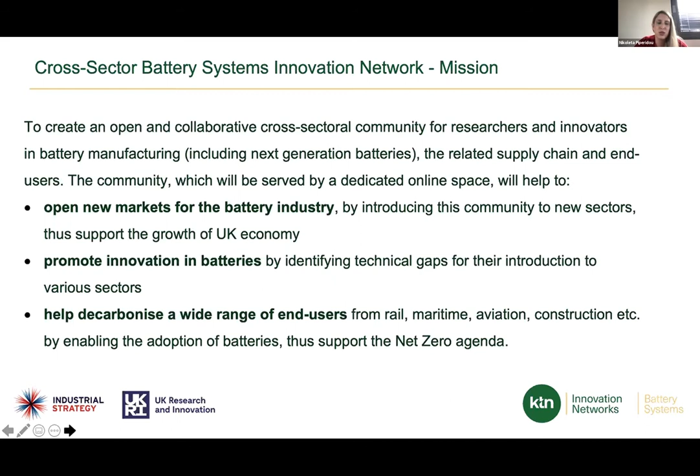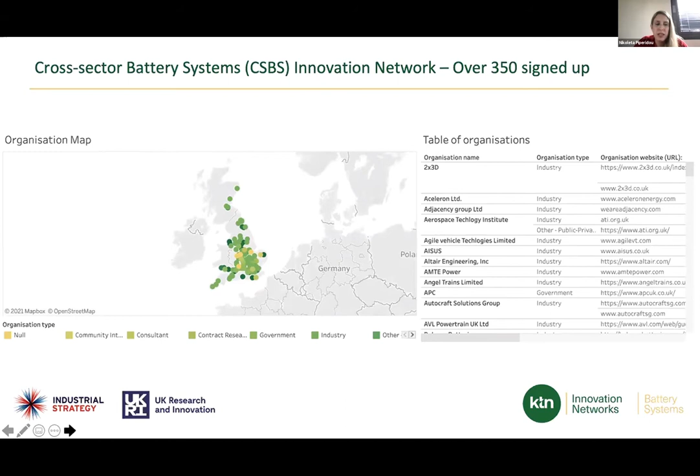We've started from a small and diverse group of founding members, and we've now moved on to over 350 members that we're trying to put together in a landscape map, which will be available shortly in our new online hub. As part of our plans for Q1, we will be launching the online hub, hopefully in 2-3 weeks time. We will then work to improve the hub based on your feedback, and the main aspect of it will be a place for you to go and find any information of relevance related to batteries, funding opportunities, news, and be able to connect with other players.

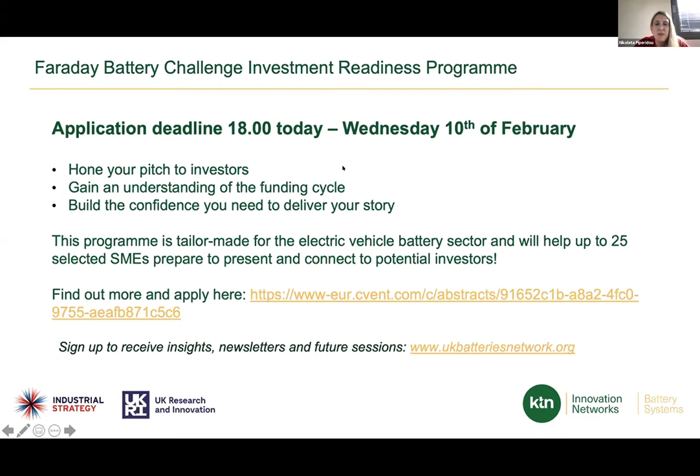Mark, over to you. Good morning, everybody. In the next few minutes, I'll present on the inspiration for us to establish our innovation network around decarbonising ports and harbours. As Nikoleta said, my name is Mark Wray, and I work for the Clean Energy and Infrastructure team with Nikoleta at the KTN. I'm also the innovation network lead, working closely with my colleagues in the transport team, Matthew Moss, who you'll hear from in the Q&A session, who's our maritime lead, and also Simon Buckley, who works on our low emission mobility work. As Nikoleta said, this was one of a handful of innovation networks launched last year.

One of the greatest challenges we face is how to decarbonise our industries and societies at large. For decades, we've built up our systems dependent on fossil fuels to energise them.

The maritime environment is a complex place with many systems converging in singular geographic locations. They're filled with substantive assets, burning large quantities of predominantly diesel fuel to mobilise them. Much of the equipment, vehicles and vessels is transitory and operates on a global platform.

Decarbonising the marine environment is a Herculean task and will require international cooperation with informed and determined local action. This is partly why the greenhouse gas emission reduction targets at an international scale are for 50% reduction. But here in the UK, we are committed to showing global leadership and have a 100% reduction target.

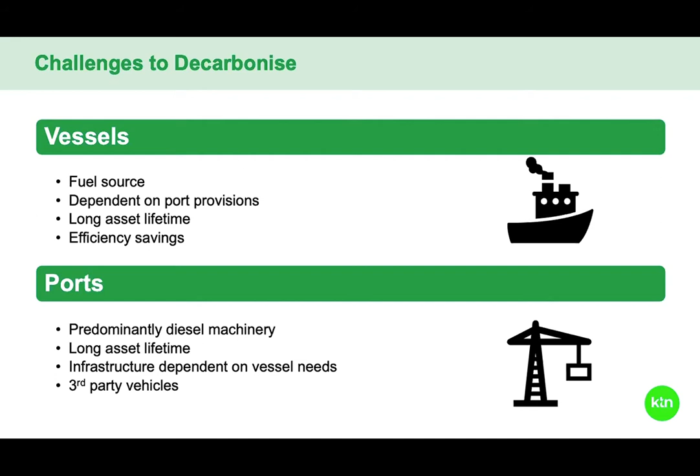So the aim of our network was to catalyse pockets of cross-sector activity and establish a community, a common goal, to enable the coordination of effort in addressing the challenge of reducing emissions associated with port landside activity, whilst also providing the infrastructure to service a growing demand for non-fossil fuel derived energy for vessels and visitors.

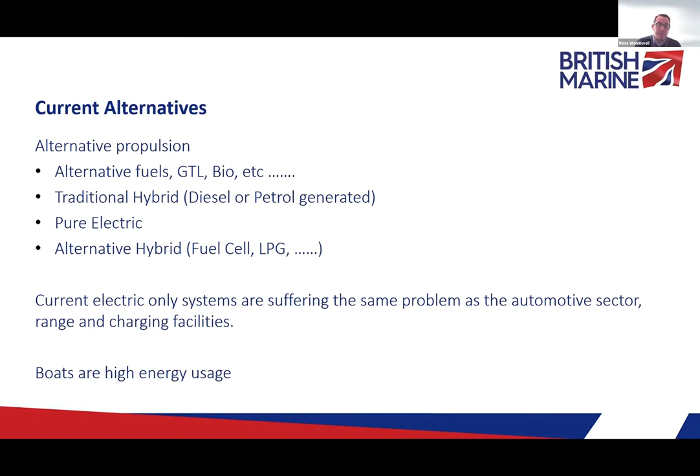Current electric-only systems at the moment for marine are suffering the same problems as the automotive sector, which is range and charging facilities. And in the marine industry, we have high energy usage.

Just pulled up a few examples of the current market, so you can see what's out there at the moment. This is a recreational craft around 35 foot. On a normal combustion engine, it'll have a range of 200 to 300 nautical miles, and probably twin 200, 250 horsepower engines, maybe up to 300 horsepower. With an electric replacement, you can see that you may get 185 nautical miles, but that's running at 5 knots, significantly below the normal operating speed of these vessels, which is 25 to 30.

When you push it, your range is going to drop down to 20 nautical miles. So this is the risk we have at the moment - we don't have the energy storage capacity to enable pure electric, which is why we're having to look at these alternatives.

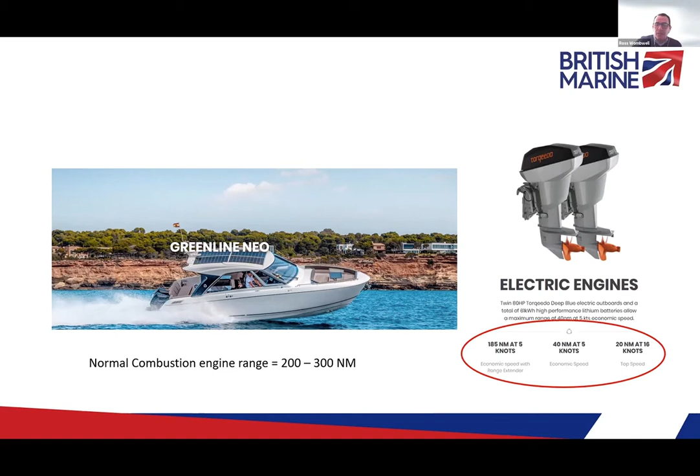Finally, this is one of the bigger boats - a traditional size vessel of what we have at the moment, around 50 foot. Again, 200 to 300 nautical miles, top speed of up to 30 knots, with 2 480 horsepower engines. But when we get to electric, you're looking at 20 nautical miles at 4 knots, maximum speed of 6.5. So you can see we have some significant challenges in how the products we manufacture operate, and these are the challenges we're going to have to find solutions to.

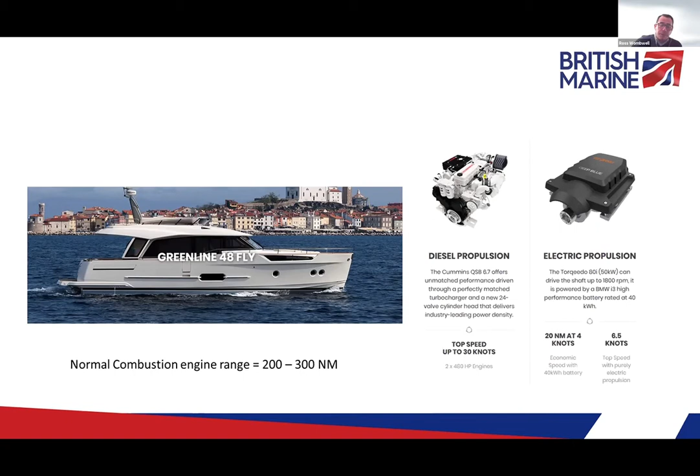The current pressure we're feeling within the industry is definitely consumer-led, and they are now asking for products we have yet to build. Every consumer is asking our boat builders, what's the hybrid package, what's the pure electric package, and in the majority we have yet to have those packages.

Regulation is yet to be confirmed on this for us, but the long-term strategy is being developed by government for the transition to zero net over the next 30 years. We are in discussions with the government at the moment on what the objective of the 2025 zero emission capability actually means - capability is a lovely word. We're certainly going to be looking at what that actually means, and discussing with the government how, as an industry, we can try and achieve it.

The market is small in number, but high cost in price. There is a market, and as I said, it is consumer led. We are hearing that the smaller pure electric, such as electric outboards, etc., they're selling out - we can't get enough of them at the moment. So there is a market for it, and we need the technology to meet the customer and the consumer expectations.

The industry as a whole, lots of SME OEMs, very, very hard to get into. We are a cottage industry, except for a few big companies within the industry, and when I say big, I'm only talking about an 80 million turnover plus. So we are a small cottage industry. It's hard to enter, it's hard to get connections, and that's what we're here to support and to help. And that's why I'm here today.

I'm a commercial director with Artemis Technologies. We're a spin-off from the Swedish America's Cup challenger Artemis Racing. Historically, we provided design and engineering services to both high-performance racing teams and commercial clients, and also developed some unique hardware solutions for our clients, including maritime simulators and other control hardware pieces.

Our big mission when we started the company was really to see how the technology that we'd developed through the America's Cup, namely hydrofoiling and wing sail technology, could support the decarbonisation of maritime.

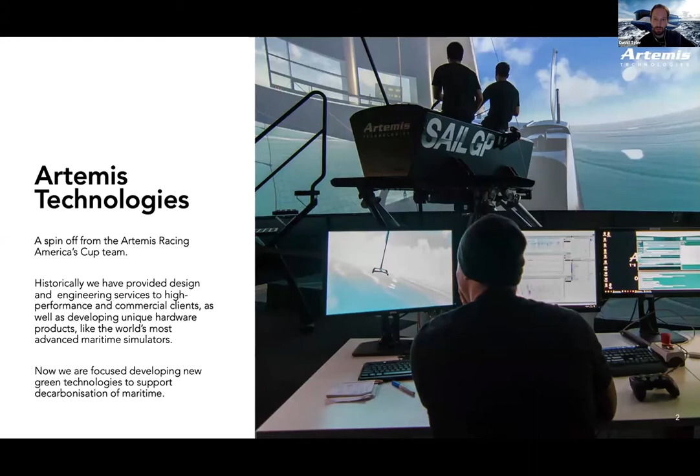I want to talk a little bit about what we're doing and why we're very interested in development of battery technology within maritime itself. Over the last couple of years, we've been developing our Artemis eFoiler electric propulsion system, which is a combination of technologies from the America's Cup, hydrofoils, aerospace, control technology, and high power density engines developed through motorsport. This hydrofoiling propulsion system is for high-speed vessels, and it significantly reduces operational costs through fuel savings. We're hoping to launch this technology later this year.

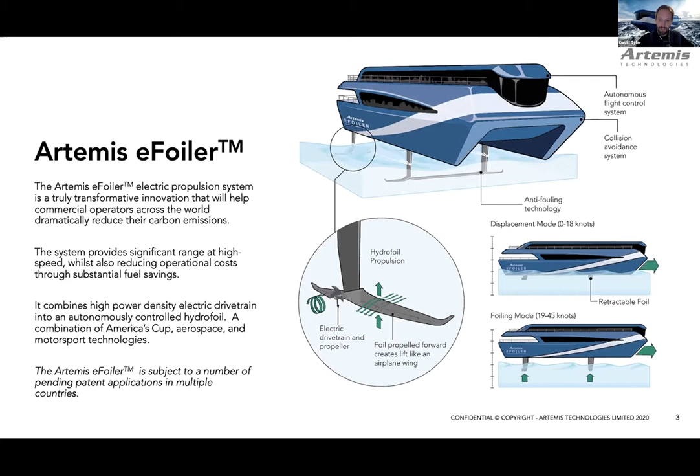The first boat that will launch with this technology will be an 11-meter workboat. It's great to see Ross talking about the other technologies and power solutions delivered by Torqeedo and those players in the market. But with our system, we're aiming for a cruise speed of 25 knots on this 10-ton vessel, a top speed of over 30 knots, and a range of 60 nautical miles at that 25-knot cruising speed.

So we really think that this technology is going to be quite transformative, and for the next few years we believe it will be the only really commercially viable solution for high-speed maritime transport.

Following the workboat, we will be launching a high-speed ferry in 2023. We will also operate that ferry in a pilot scheme between Bangor and Belfast in Northern Ireland. Nominally, it's going to be 35 meters, over 90 tons, with a cruising speed of 35 knots and a top speed of over 40 knots. So really targeting inner city transport, commuter transport services.

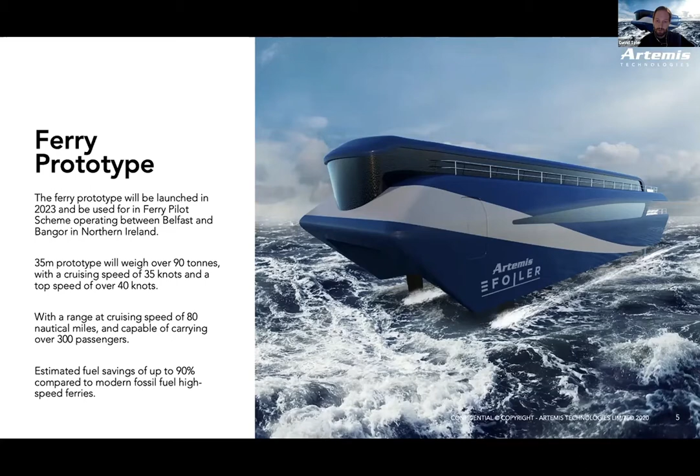At a 35 knot cruising speed, we're hoping to be able to deliver 80 nautical miles with pure battery energy storage systems. Compared to current fossil fuel high-speed ferries, high-speed catamarans that you might see going to Isle of Wight or in San Francisco, this technology can deliver 90% fuel savings through both drag reduction and efficiencies of the electric drivetrain.

So batteries in maritime today. There are a number of vessels operating already. Over the last few years, it's been significantly increasing, with big drivers by the IMO to hit emission targets.

I think generally, we as a society globally understand that climate change is happening and we need to do something. With the IMO lead, the maritime sector is really now waking up and needs to act, and it needs to act fast. Batteries are one of the few available options for ships to completely operate without emissions, but at the moment only really for very short distances.

Whereas automotive is able to switch predominantly to EV battery for emissions targets, as Ross mentioned, mixture solutions are necessary for boats due to the sheer scale of the power requirements and the size of the vessels that we're talking about.

The big change really has been driven by advancements in lithium-ion battery technology from automotive. While maritime battery systems are different from those used in cars, they require different battery management systems and higher powered energy. The battery cells are essentially the same, but there are challenges in maritime. If there are fires or issues in an EV car, it's very easy to jump out and get out. Obviously there are more challenges when you're on a boat out on water, so there are significant certification and regulatory requirements as well for maritime that it has to overcome.

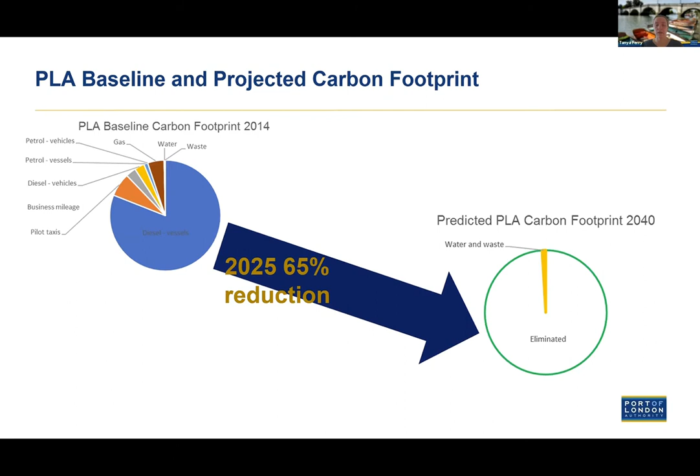We are going to be switching all of our vessels to biodiesel this year, with the last one being switched in early 2022. But that only gets us part of the way. We also have to consider the vehicles we use to take staff up and down the river, where vessel access isn't appropriate. And we have our entire fleet of vessels to decarbonise by 2040.

In terms of our operational sites, we've done some work across the river which I'll refer to as an inland roadmap, a decarbonisation roadmap for vessels which included the PLA's own fleet. In order to decarbonise, our sites are going to require, just for individual vessels, between 700 and 6,000 kilowatts to be provided to those sites, per vessel. What we believe is technically feasible at this precise moment in time is slightly different, as you can see. So there's a challenge in how that might happen.

One thing to note is the vessel roadmap does include battery hybrid as well as fuel cells. So there's a potential mix on the river and at our sites in terms of battery, hydrogen, or hydrogen carriers, and for the short term, biofuel itself as a mix at those sites. Keeping them safe is going to be part of that challenge.

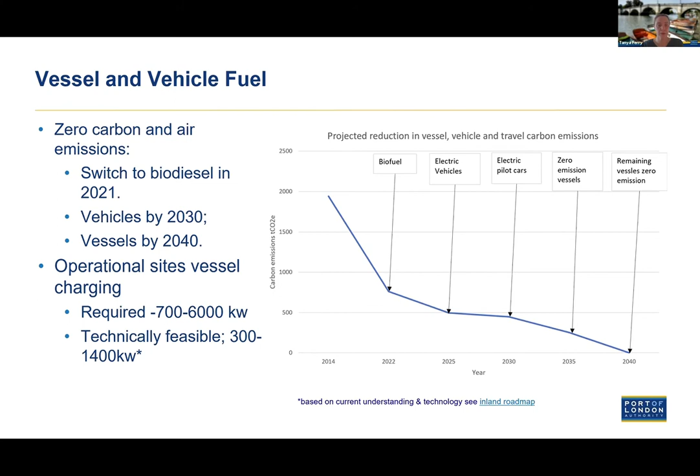In terms of the port, it supports several thousand jobs and has a significant GVA, particularly for the southeast contribution. So it's quite important that it continues to run in an appropriate way to support a just transition in terms of keeping jobs and the economy running.

At the moment, a lot of the supply has a fuel component, so fuel for transport on the roads, aviation, as well as the maritime sector. But you'll also see containers and a number of other cargoes and construction materials coming through the port.

In terms of how we get goods into the capital and how we move people, there are 9 million passengers traditionally carried on the Thames. Obviously that has changed over the last 18 months, but that's the normal volume of passengers you'd see moving on the river, along with 5 million tonnes of cargo, traditionally construction materials.

Those vessels, which are slightly larger than the PLA's vessels, require the carriage of up to 4,000, almost 5,000 kilowatt hours to continue their current operation. So the roadmap we undertook looked at how continued operation would be sustained in terms of the fuel that would be required. The next challenge for us as a port authority is to work out where that power is going to be provided from. Larger, deeper vessels are quite a challenge on an inland waterway.

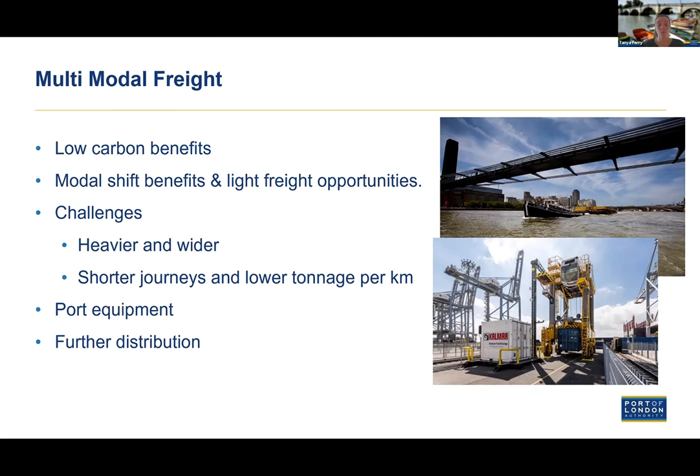So there are solutions out there, but they are quite challenging in terms of how you might power that alongside the vessels coming to it. So in terms of infrastructure, do we do that first, or do we plan for it and leave those assets there hoping they are the ones required? Do we future-proof? As Ross has already mentioned, there is an element of vessels being designed for this, but is infrastructure being designed for that future-proofing?

What the power demands might be? How do we scale up when more vessels come online? Are the solutions going to be chicken or egg?

Do we put the vessels on site on the basis of the feasibility in our inland roadmap? It says feasibility for infrastructure is 2027, but in some cases trials for the vessels could happen as early as 2022. That doesn't sound like it's going to be a viable trial if you haven't got the infrastructure even feasible. So we are doing a piece of work this year to look at where that power is across the 95 miles, and how the mix of power and fuel is required over the next 25 years, to help plan and transition that future-proofing for both infrastructure and vessels, to give the inland operators some certainty about their investment.

We recognise batteries are part of that solution, but as we've found with all the other technologies we've talked about in terms of decarbonisation, we're not seeing a silver bullet, but we are seeing silver buckshot. We are looking at research at the moment, but that is only taking us so far.